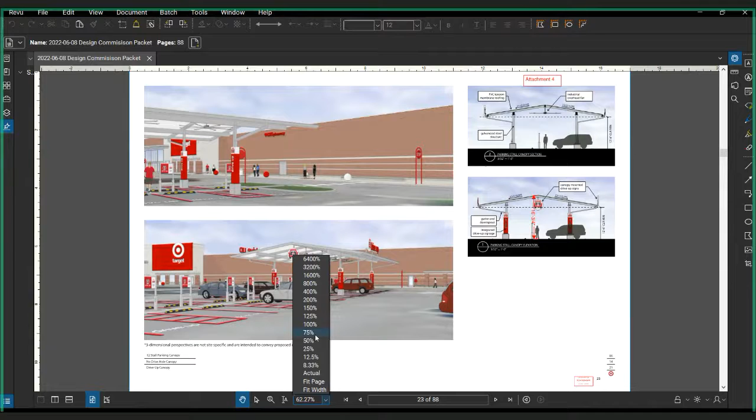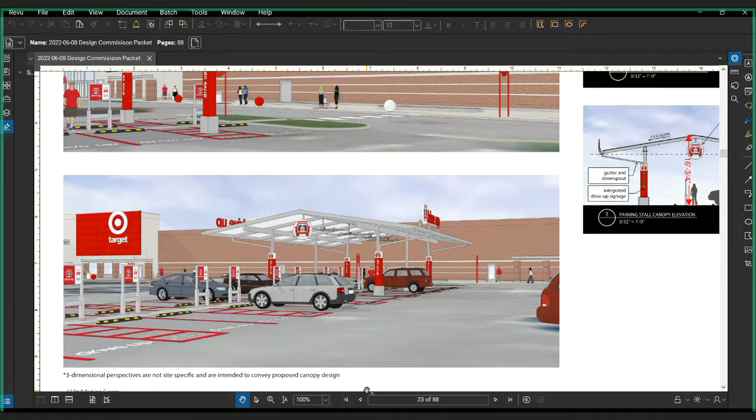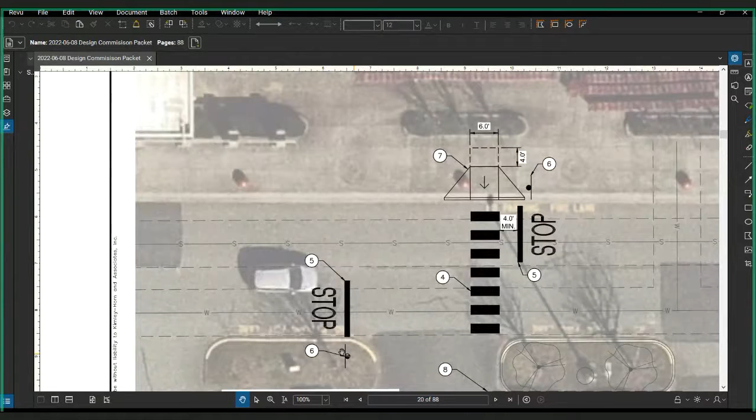It is specifically to have a safer and drier area for employees to deliver packages to the drive-up area. As for how it meets the code, it pretty much has very minimal impact. It's a permitted use in the zone because it's part of the Target retail store - retail stores and supercenters are allowed in that zone. It meets all bulk regulations. It is fairly centered in the center of the property, so setbacks are perfectly fine.

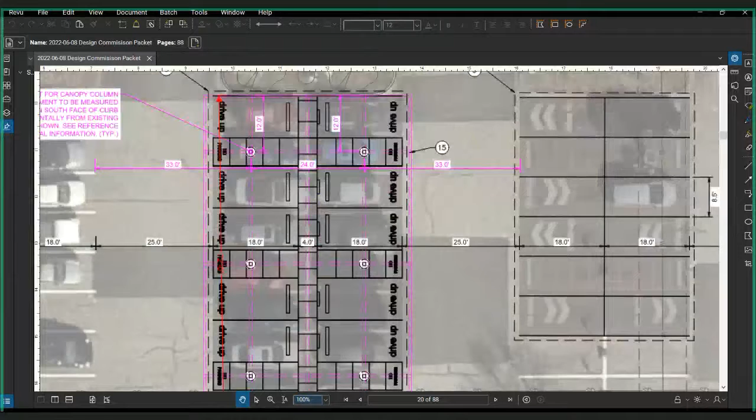They are proposing no landscaping alterations, so we're not requiring any additional landscaping or making them put additional landscaping in that they would have removed previously. Lighting is the only questionable portion of this. I do have as a condition of approval that a new photometric plan will be established because initially they had designed it for a different portion of the site, and that photometric plan they provided was for that plan and not this current one.

Parking still meets parking standards with the drive-up - it well exceeds that. Design of the canopy is not regulated because it's under 100 feet in length.

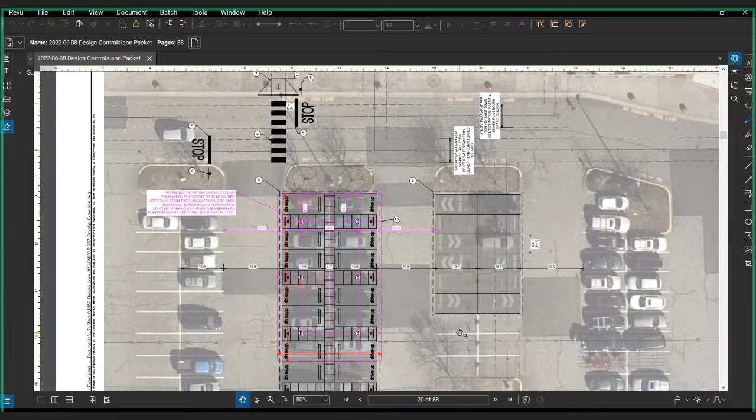The only other condition of approval I have is that they're planning to have a light pole to the north there, but we would like the crosswalk relocated directly in the center of it so the employee won't have to go behind the first stall to access the walkway. So we recommend relocating the light pole situated at the center of the island, and then relocating the crosswalk so it meets up with that.

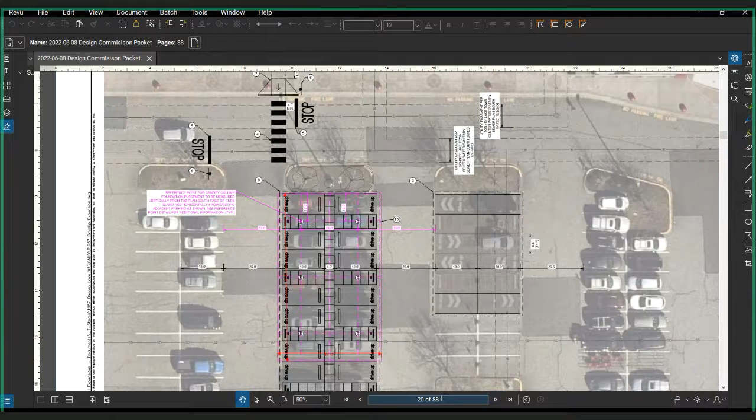And the location of this is between the front of the Target, the side of the building that faces 410, not the north side or the east side, I guess. Correct. Okay.

Anybody have any comments, questions, or concerns? I do not, this one was pretty minor, pretty straightforward. So I don't have any comments.

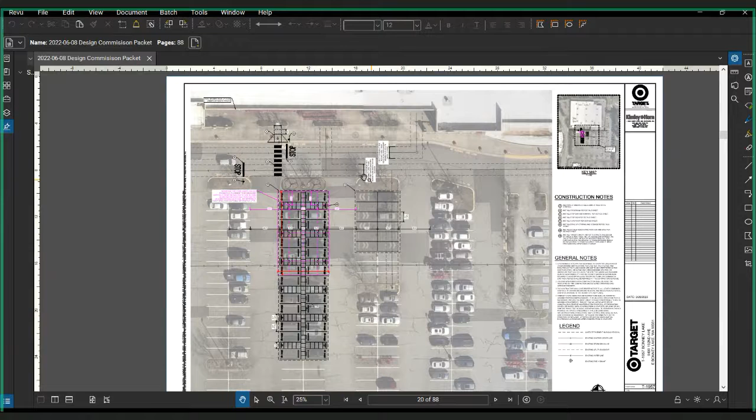Location-wise, it looks very similar to where it is now. You can actually see on the site plan where it is currently, it's one parking row away from it. They decided to do that because they were originally going to have it there, which would displace some landscaping, and so they thought this way would be a bit easier.

I've noticed when I go to the Target, the people who bring things to the car are coming out of a side entrance closer to that parking. You can see where the articulation of the building is at the front corner there, that's around the door the employees come out of to deliver packages. Seems like it makes more sense. Yeah.

I always park on the east side, so I didn't know that they had this. Hearing no further comments, anybody have any further comments or concerns?

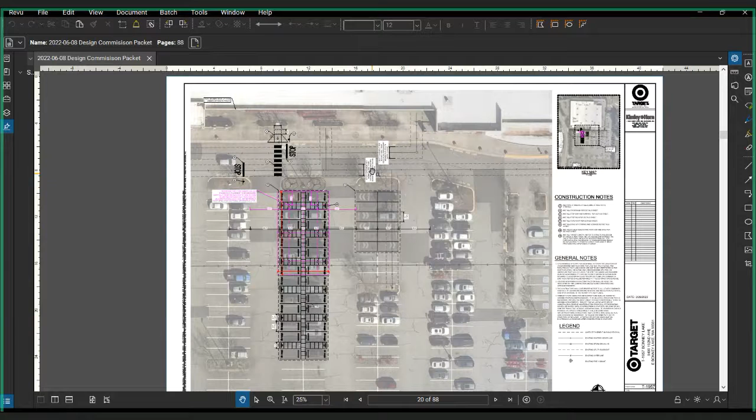Yeah, okay, so I move that we accept this project, subject to the conditions noted in the packet. Second. All in favor? Aye.

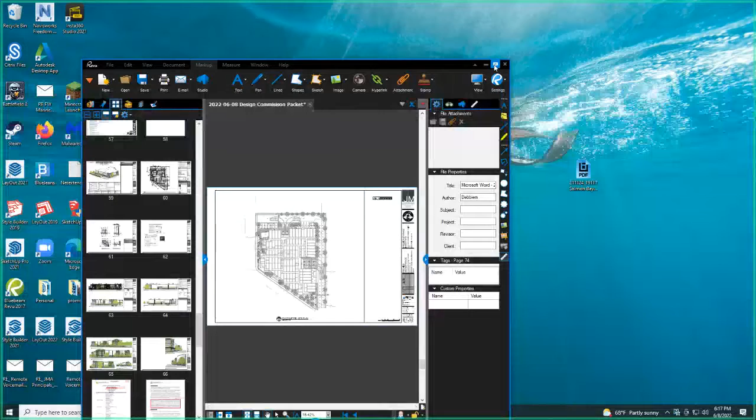Yeah, so I'm not sure. I see Gela, you're on the line here. Robin, there you are, do you want to present anything this evening, Robin? Yeah, can you guys hear me? Yes, we can. Great, so can you see my screen? I just shared it. Yes.

Robin Murphy is the principal founder of Jackson Main architecture firm, who's the design architect on this project. So very, very happy, thank you Robin.

Thanks, Rob. So we met about a year ago with Jason and Nathan at the City of Bonney Lake to talk about this project. This is approximately 100,000 gross square foot, 3-story self-storage project. Most of the units are accessed from the interior of the building in 2 loading areas.

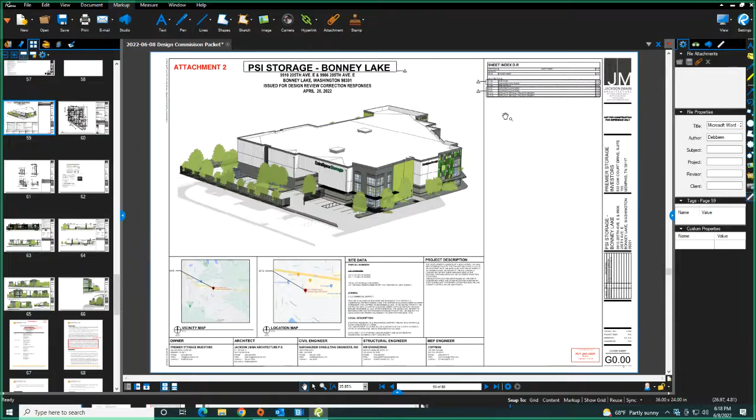There are currently 10 parking stalls around the perimeter of the site. I'm going to go to the site plan here, I think it better explains it. So we have 10 parking stalls around the perimeter, and 2 loading areas, one at the north—north is at the top of the page—and another one on the east, facing an interior lot line in each case.

To the west of that is the office, shown here shaded, off of 205th Avenue East. And then over here is 100th Street East.

We made a number of changes to this plan in the early part of this year based on preliminary input we got from Jason and Mehdi, and hopefully those improvements are well received by the board.

They include removing the external units along this face and along this face. Those are all externally loaded units, which is pretty typical of a multi-story storage building—there's a certain number we try to have as external units. We've removed them all to meet landscape and screening requirements, so that area was replaced with landscaping. We've retained these 5 stalls here and these 3 here that are still externally loaded, and that's it.

Everything else is internal. I want to go quickly to the elevations—this is the west elevation.

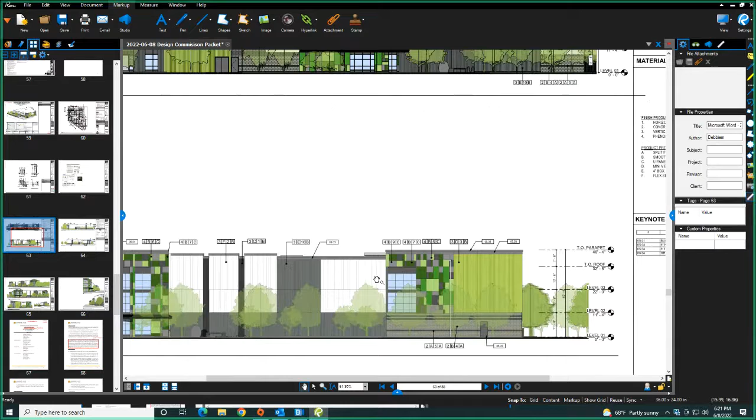And then on these tower elements, which we have in the corners, we've introduced glass, and you look into that and can see units. Here at the northwest corner, you'd actually be looking into the office with units above that. So we actually have 3 tower elements on this building.

And you can kind of see that better in perspectives here. This shows an indication of how the landscaping is intended to go. So around this corner here, there'll be a lot of landscaping on the street.

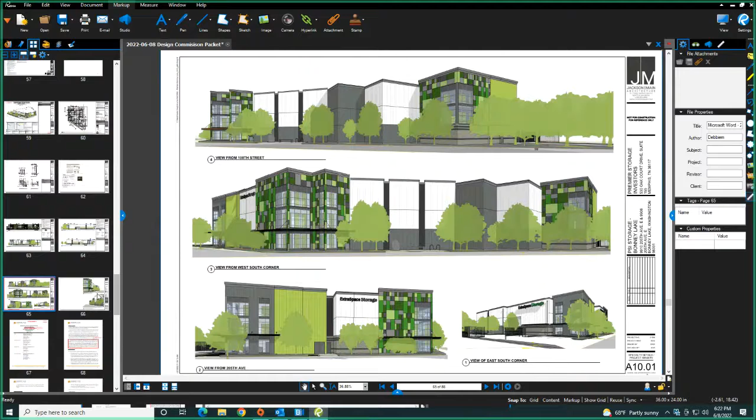Here's 2 tower elements here. This is the west elevation along 205th, some signage, the office, some space above that. And then the other 2 elevations are internal.

So this is the elevation facing north, which faces a lot, not a street. That's the office right there. And then this one is facing east, and here's the other loading area. So there's the north loading, and then there's the east loading.

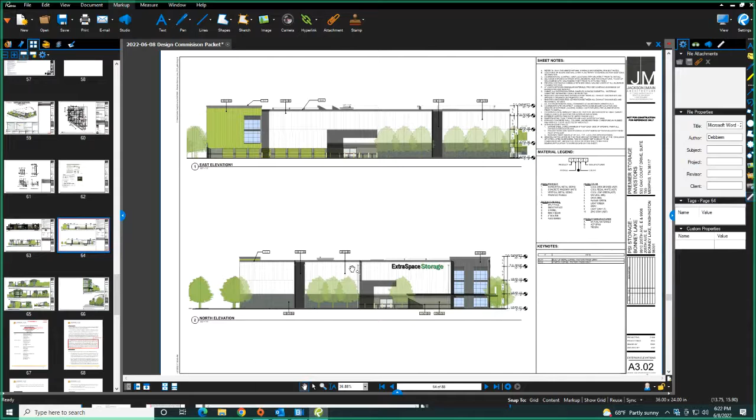These have been pretty simplified, but essentially you still got the CMU base. Those are the remaining externally loaded doors. Here's that white siding I just described, which forms the vast majority of the materials.

Going back to this elevation, this kind of color area is actually phenolic panels. It's Trespa is what we're planning on. Trespa is a high quality phenolic panel. We use it on high rises. It's very, very durable - more durable than cement board panels, Hardie, which is very common for storage and for multifamily. So we're stepping up to a higher quality material here.

And then the CMU, and then the rest of it is all metal. So it's all very durable materials.

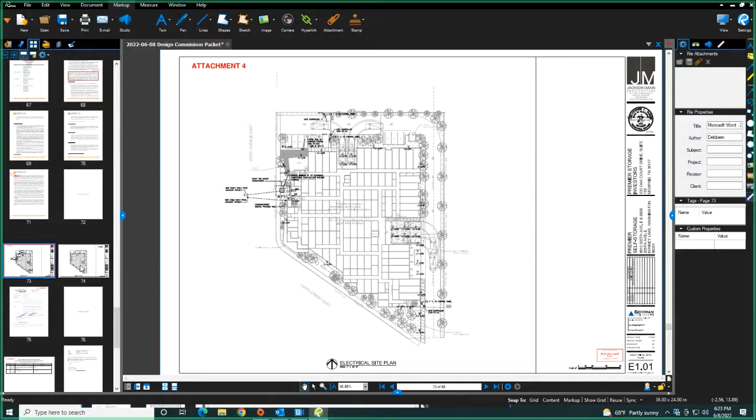I'm hoping we have a landscape plan in here. I guess this might be the best I have. This shows turning radiuses for trucks maneuvering in and out. There's a security gate here, and there's another security gate here. So the intent is that you'd come into the site and back in to load and unload. Same here, you'd come in, then you'd load and unload. Essentially we view this as a one-way road going through the site.

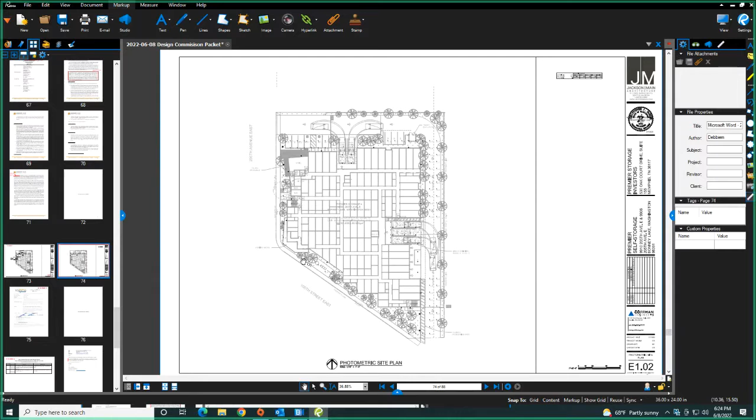Landscape - there's the dumpster right there with the requisite landscaping around it. We have the landscape strip buffer around the perimeter of the site. And there's adequate shading that's all been confirmed by our planner. And then we added a lot of landscaping along the street here.

Here we have the site furnishings. They're kind of amenities. There's a small sculpture of a pine cone, a bench, and some bicycle parking.

I saw that one of the conditions was that bicycle parking needs to be on this street as well, which we weren't aware of. What I would propose is potentially relocating it either to here, or if we have to put a second grouping of these on 205th, I would propose that it goes in the plaza where it can actually be used. This is really orphaned where it is now, and we're really just following the long-range plan to locate it here. But I don't feel like it is going to get utilized very adequately here.

So it feels orphaned. And if we're adding another one, I think we should add it into this plaza where it's justified that we'd have a bike rack, some benching, and a sculpture.

So that's that. Another comment that was made by planning was that this parking stall is unacceptable because it potentially blocks the use of these externally loaded units. We do this quite frequently on storage projects, but if that's the determination of the city, we're okay with that.

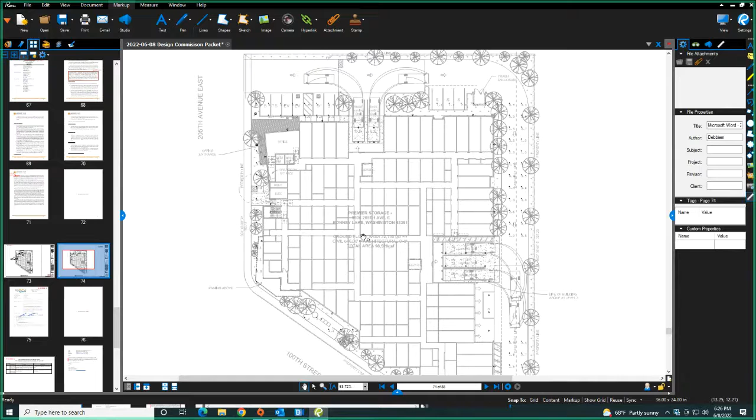Going back to the elevations, let's see here. Sorry, I'm going to skip around.

A comment was also made by planning that as this building is over 35 feet tall, we need fire department approval. We have that approval—we've talked to them and vetted things, since it's important to get their buy-in before we cement these drawings. We did that very early last summer, and I have an email to that effect. But let me explain how that fire access works.

That red box there and that one there are two dead-end fire lanes that are less than 150 feet long. They're 28 feet wide, as Bonney Lake's fire department requires, and they aren't separated from the building, but that was acceptable by the fire department.

This one is actually separated from the building by 15 to 30 feet, which is what the IFC requires. Normally, the IFC for aerial apparatus access would require a 26-foot fire lane for a building greater than 30 feet. This building is a little over 40 feet, so we provided it, but then we were told it's actually 28 feet, not 26.

So we made those adjustments to all these drawings, and I have documents that indicate we got that approval. Our initial intent was that the fire loop goes all the way through the site, but the fire department said that wasn't necessary here—they just want it here and here.

Lastly, I think I've already talked through that. So if you guys have specific questions about the elevations or the site plan or anything else, I'd be happy to answer. But essentially that is where we're at, and we look forward to your comments.

What does the security gates look like? What are they made of?

That's a good question, and I'm sorry I don't have a drawing for you on that in this packet, but essentially they're very robust, powder-coated steel, 8 feet tall. This one is a sliding gate—I think it's a sliding one. Let me check that here for a second.

No, I believe they're actually lift gates. At one point we had them as sliding gates, so it doesn't really matter whether it's a lift or a sliding gate—the material's the same. So it's an 8-foot fence, powder-coated, probably black, that at this point would pivot upwards to allow access in and out and create a secure environment.

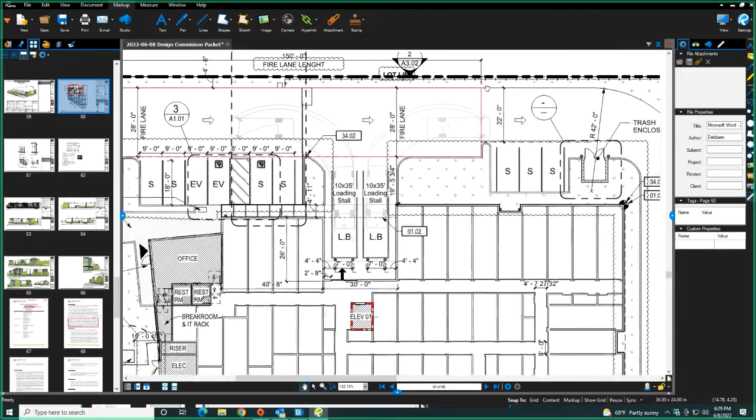We'd also be putting a security fence at the perimeter wall along the north from this point, then wrapping down on the east all the way to this point. That would be a very similar product, steel powder-coated, black or gray, that meshes and forms a secure area, so that somebody who isn't supposed to be in the building after hours or during hours can't physically get in there.

This is pretty common in storage. We want a secure environment, but it also needs to be very aesthetically pleasing. We're not proposing to put up a chain link fence or something—this is something much more durable. Okay, good.

Now, with respect to the location of bicycle racks, is that under the purview of the design commission? The applicant is proposing to put some bicycle racks different than what either the design standards or the city code requires. So is that under the purview of the design commission, or is that something else? The location, yeah, I would say that it's under the purview of design.

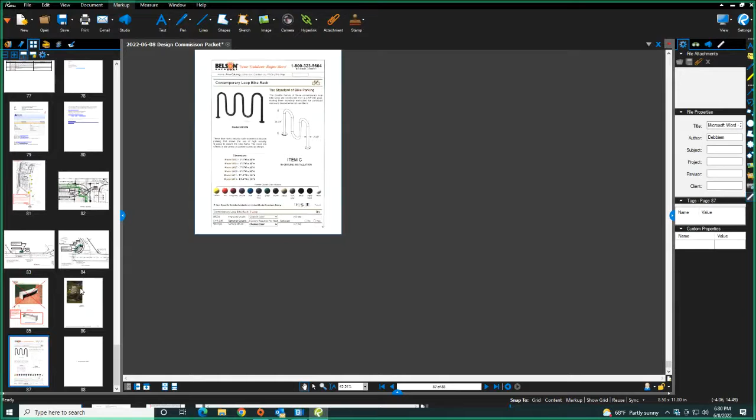Hey, this is Rob DeJean, the applicant. Robin and others, I do believe per the shopping center requirements, we have to have those elemental design elements—I think it's a pine cone, I believe—and bench and such.

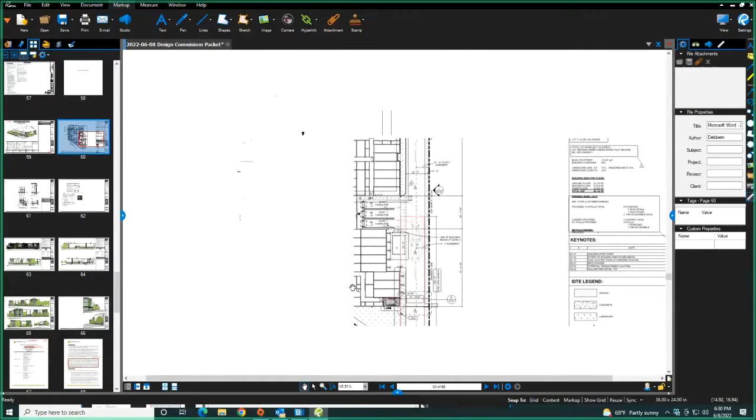I believe we are required to put them on 100th Street, which is where staff had requested. I'm not so certain about the bike rack part, I don't know if that's included, but we do need to comply legally. There was a requirement from the EIS, so it's not a design code requirement, it's a requirement from the EIS.

The original property owner prepared that amenity plan and had it recorded on everyone's title that's pulled up. There has to be an amenity on 100th. I keep reminding people that while it's a dead end road now, that is the future entrance to Midtown Park, so when that park gets developed, there will be lots of people walking up and down 100th Street.

to access the park. And then they have to put one on 205th. The exact location on 205th can slide north or south, so putting it in the plaza area is not necessarily a bad thing, as long as it's right behind the sidewalk and it's clear that it's for all pedestrians, not just their tenants and their specific amenities that they have to put in.

Okay, based on the amenity plan, it's a little different. I'm showing the locations, and you're right, we're actually lot 7 and a portion of lot 6, so there is a location here that we missed. But putting it in the plaza area seems like a logical location, and we can certainly locate it close to the sidewalk here.

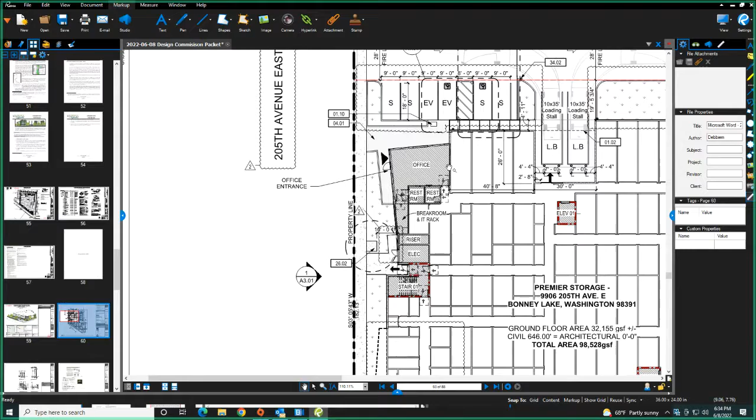And I think I heard you mention something about moving a parking spot. Yes, and replacing something to get the required 10 spots. Does that change need to be run by design commission or not? I don't think we would need to be. Okay, so they don't need to come back showing the changes? Okay, good.

Any comments or questions? Further comments and questions? So with this proposed, are they planning on having two little spots with a bench and stuff like that? Okay, I like that, because I kind of have this image in my head that this place will eventually become a place for leisurely people just coming to shop and browse around.

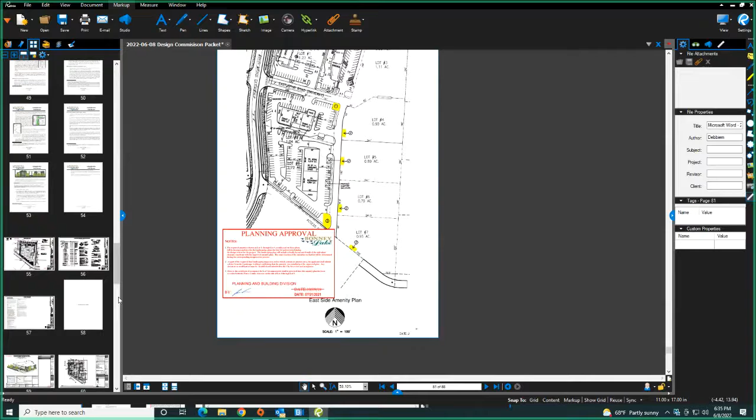One of the big questions I had when I looked at this plan is, I know there's going to be sidewalks on 101st and 205th. Are there going to be any sidewalks behind on the other side of the building? No, that's all kind of outside the development. There's another building there, but there will be sidewalk on the north and south side of 101st that will extend all the way down.

And then it's designed to provide a vehicle connection someday to the movie theater. Okay.

So, with regard to potentially connecting to the movie theater parking lots, is it conceivable that eventually people will walk from the movie theater, and say if they want a cookie and want to go to the Crumbl Cookie, they're going to have to essentially walk around this building? They're going to have to go walk. Okay, so you cannot bypass behind the building, and that's kind of an absolute. So really, they're backed up to the very edge of their parcel. Yes. Okay, just wanted to ask about that.

You guys answered the question about the existing parking lot. Yeah, so besides that, I don't have many comments. I looked at their landscape plan, I looked at their plan, they're all manageable, so I thought they were all okay. And, yeah, it looks like an appealing building. Not much more than that.

Yeah, I think that based on the illustrations provided here, it is a very attractive one. Honestly, I would have actually asked for a second seating area, which they kind of did for me, so I was like, oh great, didn't necessarily have to be the proponent for that. So I was going to have Betty go over the recommended conditions of approval real quick.

So we are recommending, get there on my page, that all lighting be dark sky compliant.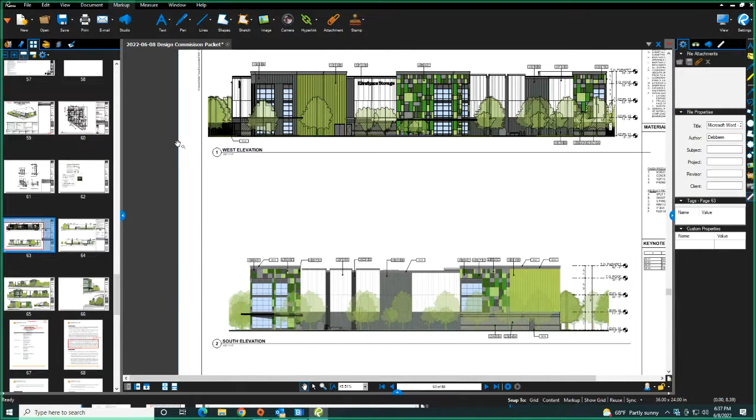The south portion of the building will be required to provide type 3 landscaping along with facade frontage for the non-articulated area measuring approximately 41 feet. An updated landscape plan will be required for the building permit process.

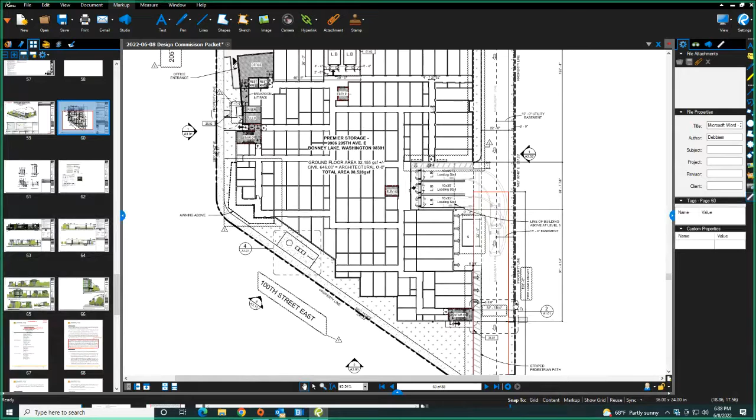This is for those 3 storage units that are being accessed from the outside. We don't believe that access from the outside is conducive to safety, just because even a car would block an emergency vehicle trying to get around the drive area. So if that could just be replaced with landscaping, we would allow the 5 that are going to be outside entry.

So our next condition is the applicant will be required to obtain approval from the City of Bonney Lake Fire and Safety Inspector regarding the height of the buildings that exceeds the allowed 35 feet. I believe Robin touched on this. I believe we have to speak with our actual fire inspector. I don't know who you got contact with previously, whether it was East Pierce Fire, but they're not the reviewer. Todd Plum, our fire and safety inspector, will have to sign off.

I believe it was Todd, but I will verify that, Maddie, and get you that information. If you could send me the information, this can go away pretty easily. You got it, no problem.

Just at point of clarification, is Todd the right person? Todd is the right person. So up until about a year ago, East Pierce Fire and Rescue did all of the review. They got out of that business, and we brought in our own fire inspector. So he is the one who is ultimately the person who has to approve it for compliance with the IFC. But it's Todd Plum. Yeah, thank you.

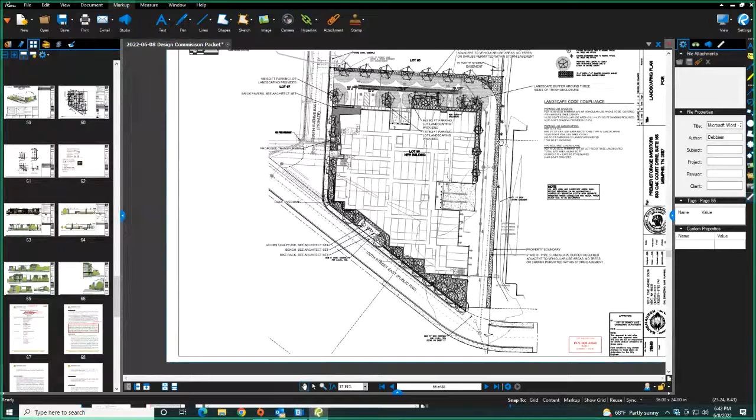Yeah, because I kind of noticed the discrepancy. The other picture did show it on there. I believe that's a previous one. Okay, I apologize, I put up the wrong drawing. This is the landscape plan.

And the reason we don't have trees along the east is because of the storm easement. So we stop them here, but this does meet all the requirements for shading, which is shown here, et cetera. So this is the accurate landscape plan. That was the one I was looking at. Yes, that little confusion, my fault.

Any other questions or concerns? Okay, hearing none, I move that we approve the project subject to the conditions noted in the staff report.

Second. All in favor? Aye. Aye. All right, the project is approved by design commission.

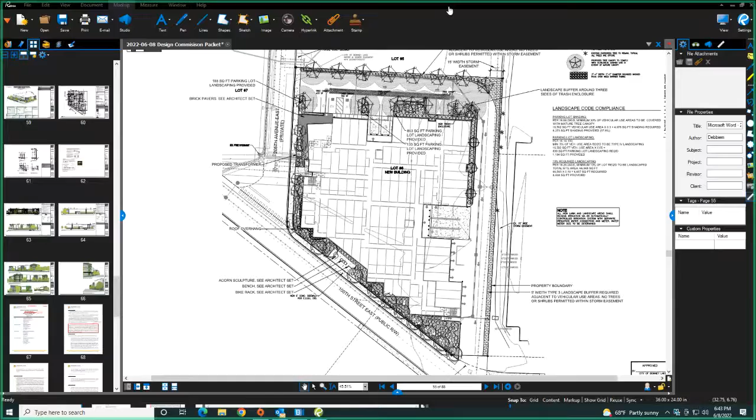So Rob, what'll happen next is you'll get the actual decision made administratively. So you'll get an administrative decision from the city with the same conditions basically of approval that are contained in the staff report. Okay, thank you.

Sounds good, appreciate everyone's hard work here. Thank you very much. Yes, much appreciated, thank you. And by the way, I must say, you guys are very efficient. I appreciate that too, I was anticipating being on this call for another couple hours, so that's great. We may be strict and to the point, but we're efficient. Yeah, you guys didn't put any palm trees in, so I'm happy. All right, thank you.